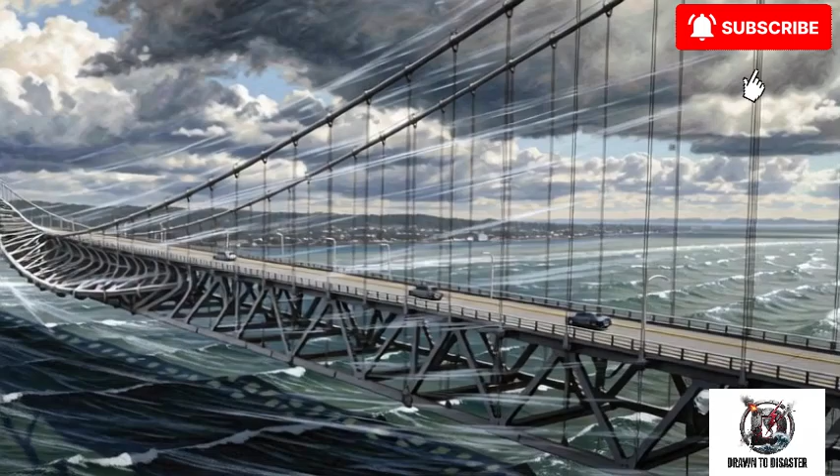The people who died on these bridges were not doing anything unusual. They were crossing water, crossing valleys, crossing roads. They were doing what bridges are built for people to do. These are the worst bridge collapse deaths ever.

Ashtabula Bridge Disaster. Ohio, 1876. The Ashtabula Bridge carried the Lake Shore and Michigan Southern Railway across the Ashtabula River Gorge in northeastern Ohio. It was an iron truss bridge, approximately 150 feet long and 75 feet above the river below. It had been in service for 11 years.

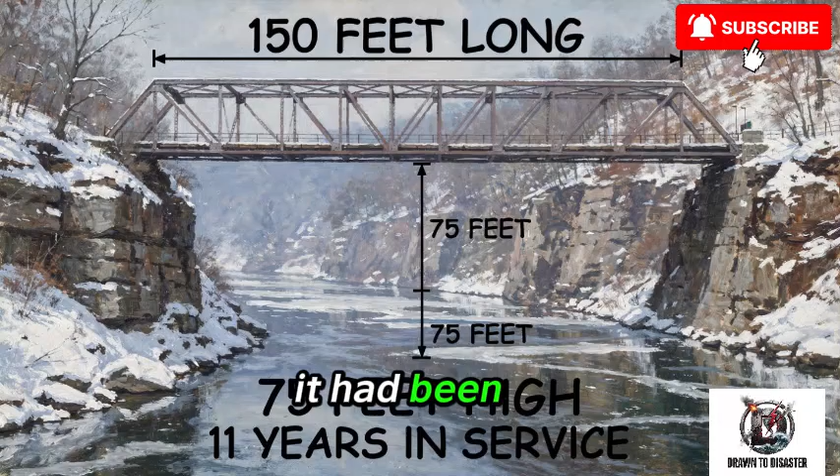On the evening of December 29, 1876, a passenger train called the Pacific Express was crossing the bridge in a blizzard. The train consisted of 2 locomotives and 11 passenger cars, carrying approximately 160 people. It was one of the busiest travel nights of the year, the period between Christmas and New Year.

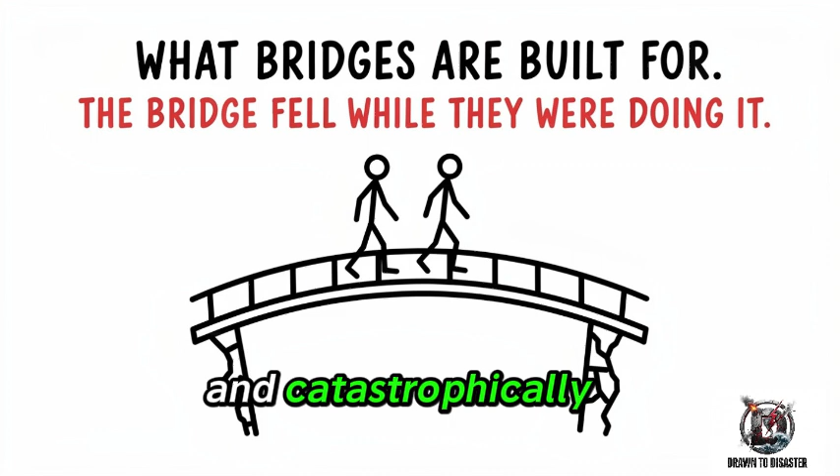At approximately 7:28 p.m., the leading locomotive crossed the bridge safely and reached the far side. As the second locomotive and the passenger cars followed, the bridge collapsed. The iron truss structure failed completely and catastrophically, dropping the train 75 feet into the frozen Ashtabula River below.

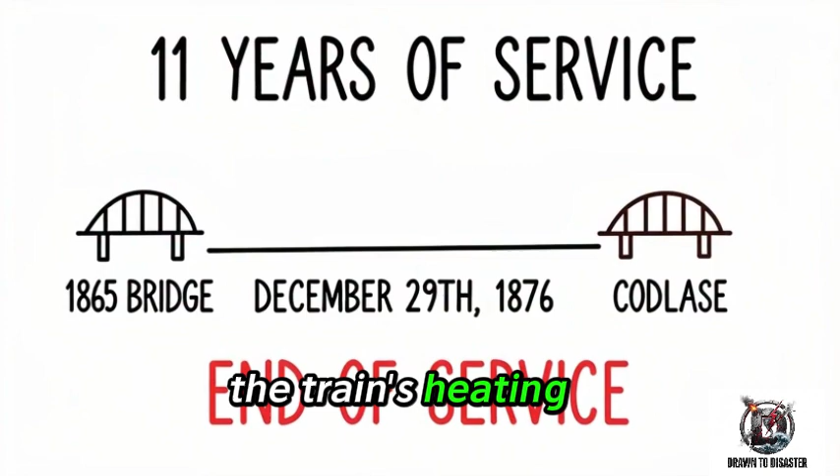The passenger cars fell onto the ice, compressed together, and immediately caught fire. The train's heating stoves, coal and wood-burning units, ignited the wooden car interiors within minutes. The combination of the fall, the crushing of the cars, and the subsequent fire killed the majority of victims. Many passengers survived the fall, only to die in the fire.

Rescue workers on the gorge above could hear survivors trapped in the burning wreckage, but could not reach them quickly enough through the blizzard conditions. 92 people died in the Ashtabula Bridge disaster. 19 bodies were never recovered, consumed entirely by the fire.

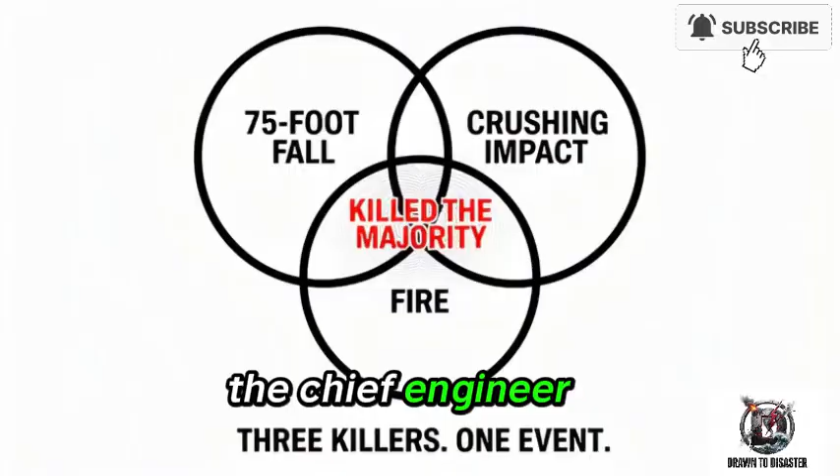Quebec Bridge Collapse, Canada, 1907. The Quebec Bridge was designed to span the St. Lawrence River south of Quebec City. When completed, it was intended to be the longest cantilever bridge in the world, a span of 1,800 feet across the river. Construction began in 1900.

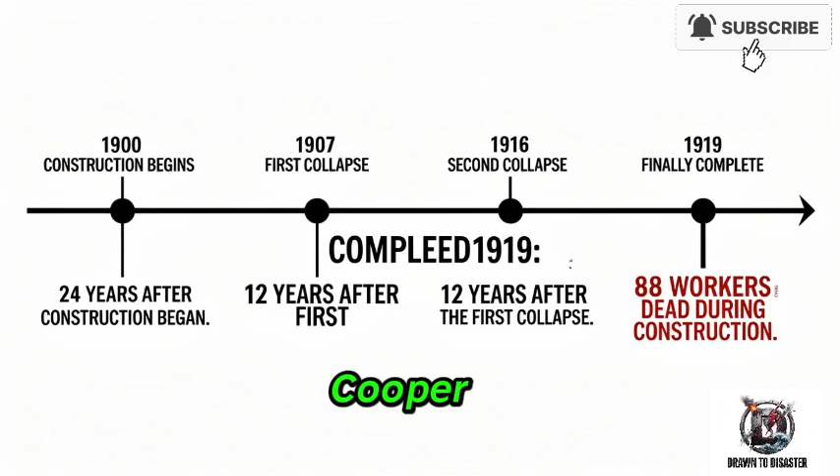The chief engineer responsible for the design was Theodore Cooper, a respected bridge engineer based in New York. Cooper had not visited the construction site in Quebec in over 2 years. By the summer of 1907, he was managing the project remotely, reviewing documents sent to him by telegraph and mail.

In the summer of 1907, concerns were raised about the deflection, the bending, of certain compression members in the bridge's south arm. Workers on the site noticed that steel members were bending in ways that the design had not anticipated. The concerns were communicated to Cooper in New York. Cooper sent a telegram on August 27, 1907, ordering construction to stop while he reviewed the situation. The telegram arrived too late.

On August 29, 1907, at 5:37 p.m., just as the afternoon work shift was ending and workers were preparing to leave the bridge, the south arm of the Quebec Bridge collapsed. The entire southern portion of the structure fell into the St. Lawrence River in approximately 15 seconds.

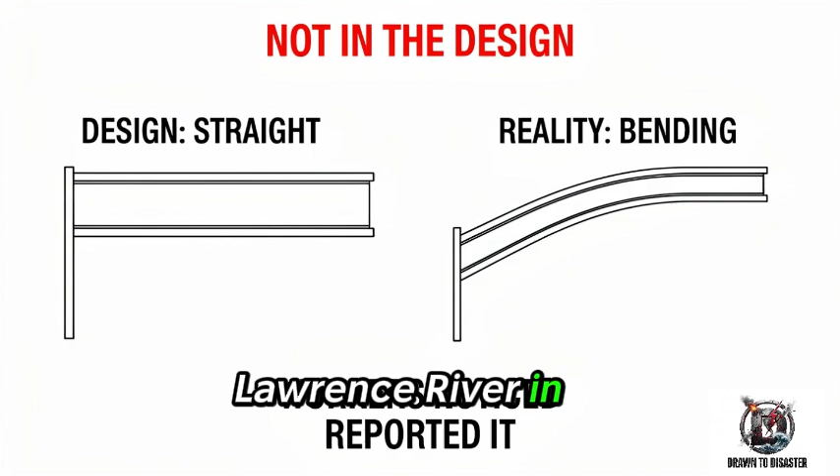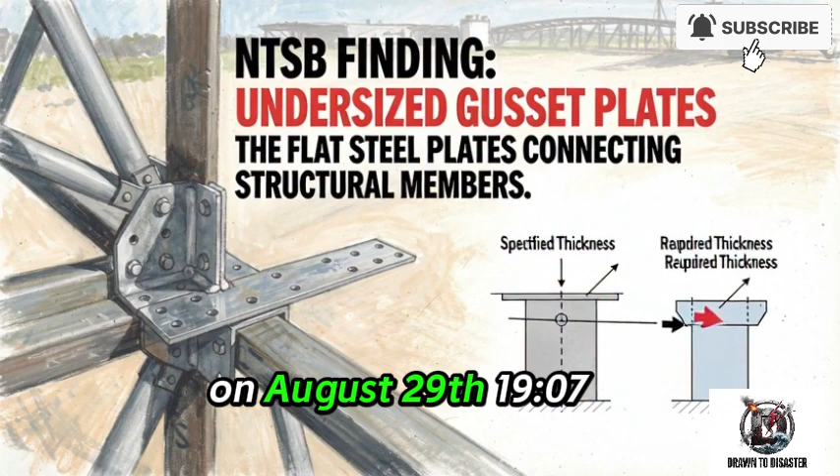75 construction workers died. The majority were Mohawk iron workers from the Kahnawake Reserve near Montreal, highly skilled structural steel workers who had become specialists in high steel construction. 33 Kahnawake Mohawk men died on August 29, 1907. For a community of approximately 1,500 people, the loss of 33 working-age men in a single afternoon was catastrophic. The Quebec Bridge was redesigned, and construction resumed.

In 1916, during the installation of the central span, a second collapse occurred. 13 more workers died. The bridge was finally completed in 1919, 12 years after the first collapse, and 24 years after construction began.

Tacoma Narrows Bridge, Washington, 1940. The Tacoma Narrows Bridge was a suspension bridge spanning the Tacoma Narrows Strait in Washington state. It opened in July 1940. From the first days of operation, the bridge exhibited an unusual characteristic. It oscillated visibly in the wind, earning it the nickname Galloping Gertie from construction workers and the local public.

Engineers and officials were aware of the oscillation from the beginning. Multiple reports were filed. The Federal Works Agency and the bridge's designers were notified. The response was to commission a study. The study had not been completed when the bridge fell.

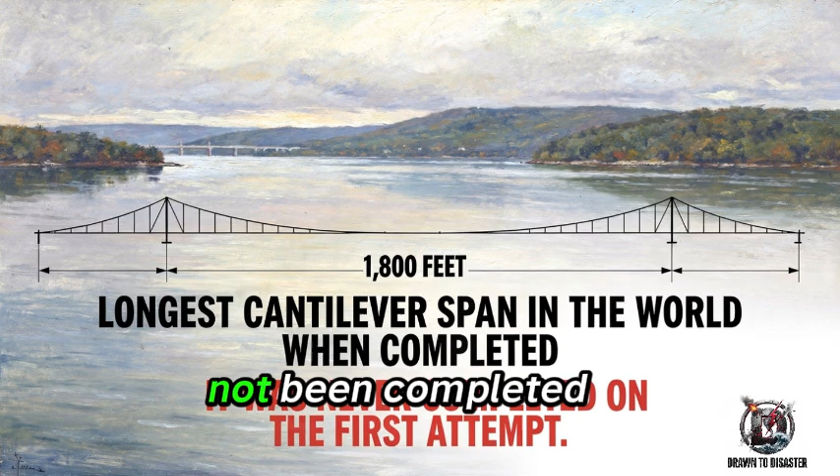On November 7, 1940, months after opening, sustained winds of 42 miles per hour caused the bridge to begin oscillating with increasing amplitude. The deck began twisting along its length. The oscillation became so severe that a man named Leonard Coatsworth, a newspaper editor, was forced to abandon his car on the bridge and crawl to safety on his hands and knees as the deck tilted 45 degrees beneath him. His car and his daughter's dog Tubby, who was inside it, remained on the bridge.

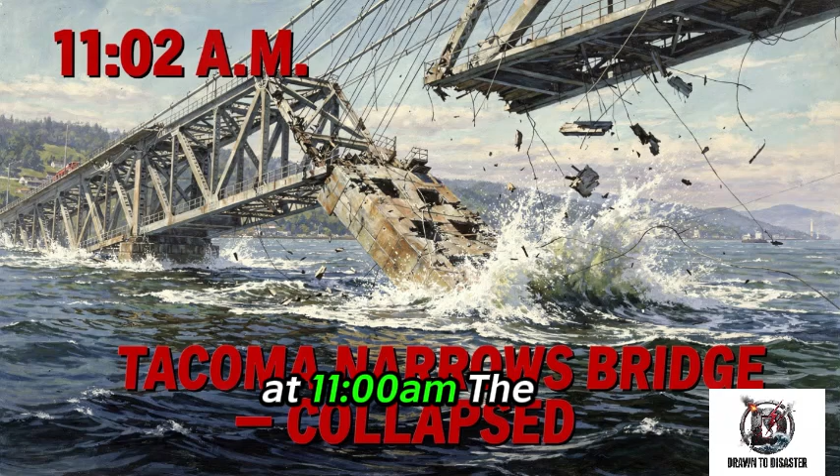At 11:02 a.m., the Tacoma Narrows Bridge collapsed into the water below. The 2,800-foot center span fell in sections. Tubby the dog died in the collapse, the only fatality of the Tacoma Narrows disaster. Coatsworth survived. The Tacoma Narrows collapse became one of the most studied engineering failures in history. Film footage of the bridge oscillating and collapsing was captured and has been viewed by engineering students worldwide ever since.

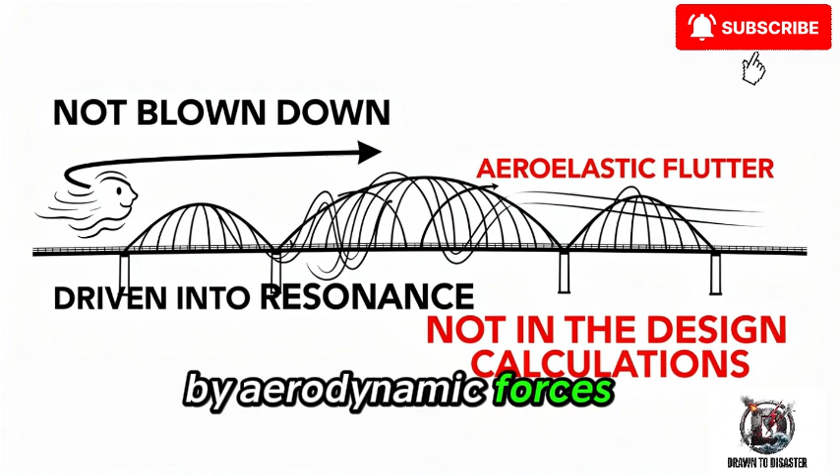The collapse demonstrated the phenomenon of aeroelastic flutter. The bridge was not simply blown down by the wind, but was driven into resonant oscillation by aerodynamic forces that the design had failed to account for. The bridge's insurance policy paid out. The designers faced no criminal charges. A new Tacoma Narrows Bridge opened on the same site in 1950.

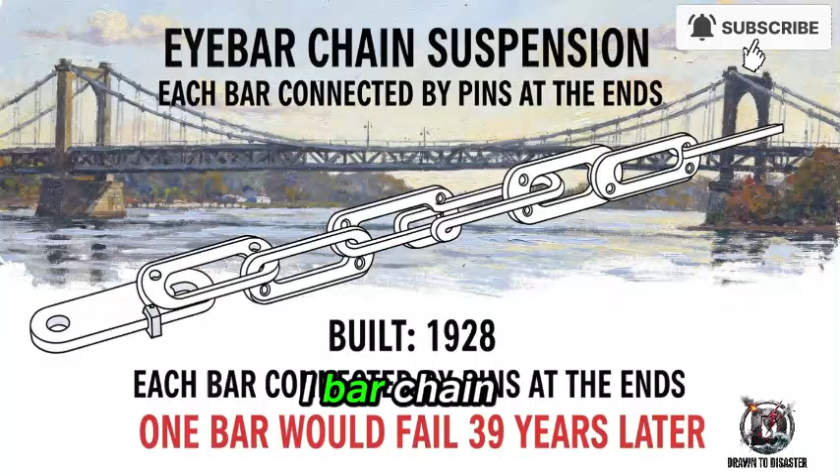Silver Bridge collapse, West Virginia, 1967. The Silver Bridge connected Point Pleasant, West Virginia, to Gallipolis, Ohio, across the Ohio River. It was an eyebar chain suspension bridge built in 1928. On December 15, 1967, it was carrying rush-hour traffic, commuters crossing the bridge in the late afternoon before Christmas. At 4:58 p.m., a single eyebar in the bridge's suspension chain failed.

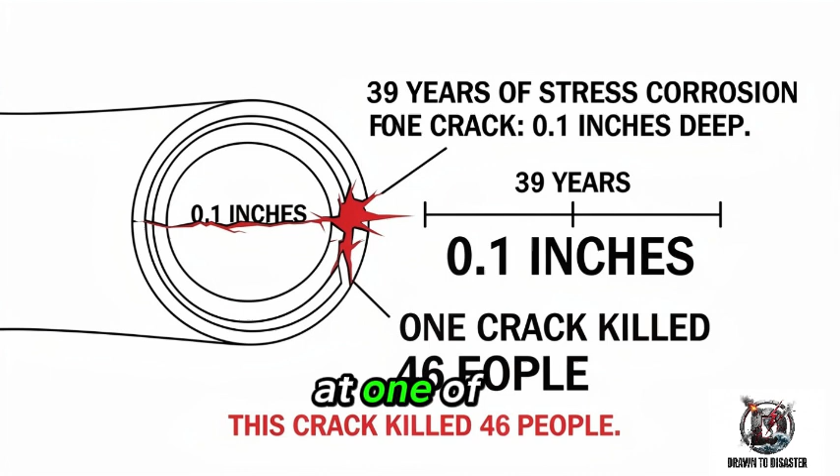The eyebar, a flat steel bar with a hole at each end through which a pin connects it to the next bar in the chain, had developed a stress corrosion crack at one of its pinholes over the course of 39 years of service. The crack was 0.1 inches deep. It was completely invisible to inspection from the bridge surface. No inspection method available at the time could have detected it.

When the eyebar failed, the chain on one side of the bridge lost structural integrity. The load transferred to the remaining structure, which could not support it. The entire bridge collapsed in approximately 1 minute. 46 vehicles were on the bridge at the time of collapse. 31 of them fell into the Ohio River. 46 people died. 2 bodies were never recovered from the river.

Among the dead was a 37-year-old woman named Charlene Wood, who was driving home from work with 2 passengers. All 3 died in the Ohio River. A 26-year-old man named Paul Cantrell was crossing the bridge on his way to pick up Christmas presents for his children. He died in the river. His body was recovered on December 17th.

The Silver Bridge collapse directly caused the United States government to establish the National Bridge Inspection Program in 1968, requiring regular inspection of every bridge in the country on a 2-year cycle. Before the Silver Bridge fell, there was no national program for bridge inspection in the United States. No standardized system existed for identifying aging infrastructure before it killed people.

De la Concorde Overpass, Laval, Quebec, 2006. On September 30, 2006, a section of the de la Concorde Overpass in Laval, Quebec, Canada, collapsed without warning onto the highway below.

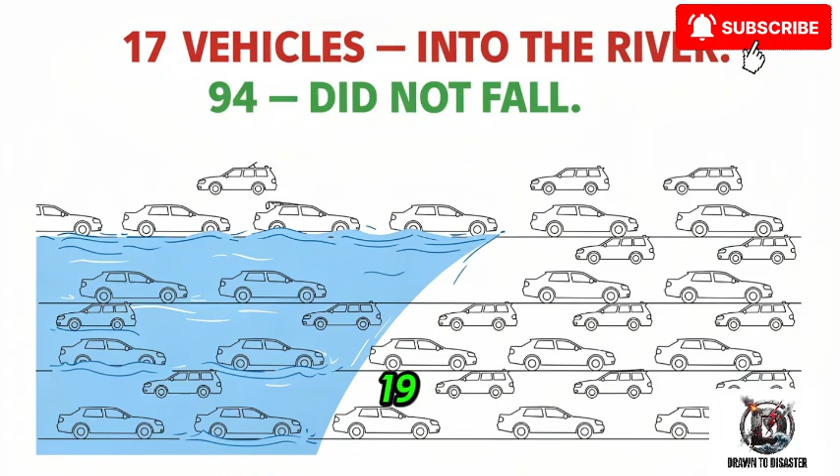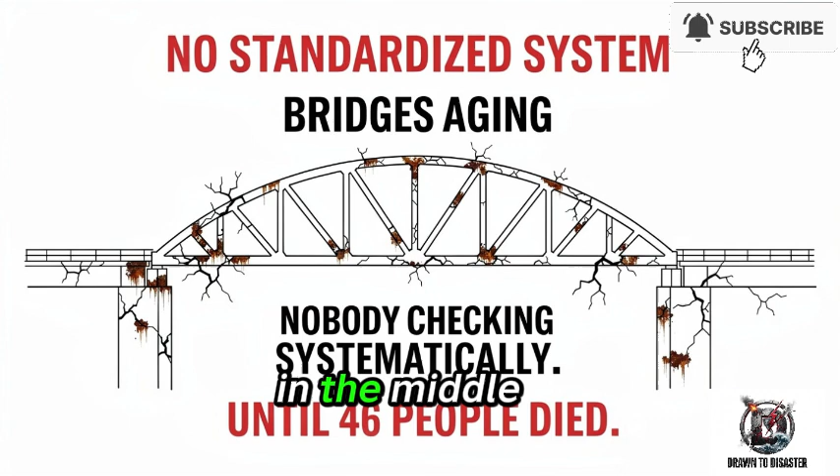The overpass carried Boulevard de la Concorde over Autoroute 19. It had been built in 1970. A 30-meter section of the overpass fell onto the highway below, crushing vehicles that were traveling beneath it at the moment of collapse. The collapse occurred in the middle of the afternoon, on a Saturday.

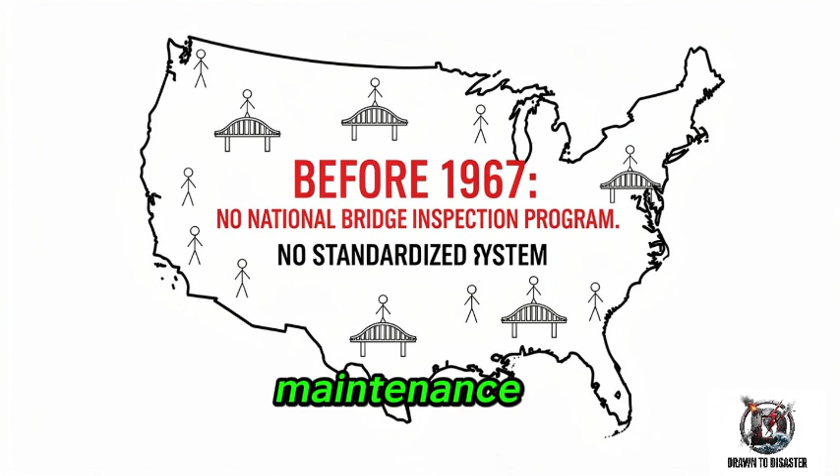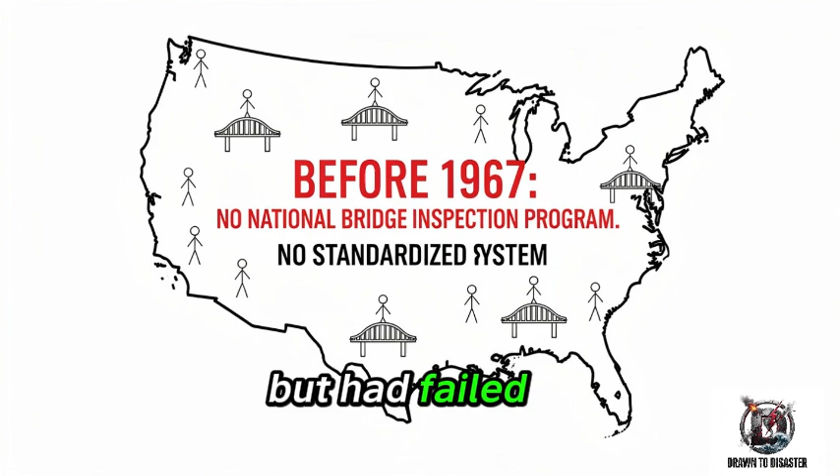The investigation that followed found that the overpass had deteriorated severely due to a combination of poor original construction, inadequate maintenance, and the effects of de-icing salts used on Quebec roads during winter, salts that had penetrated the concrete and corroded the reinforcing steel within. Inspections had been conducted, but had failed to identify the severity of the structural deterioration.

The Johnson Commission, established to investigate the collapse, found that the overpass should have been identified for replacement years before it fell. It found systemic failures in Quebec's bridge inspection and maintenance programs. 41 overpasses across Quebec were immediately closed for emergency inspection following the Laval collapse.

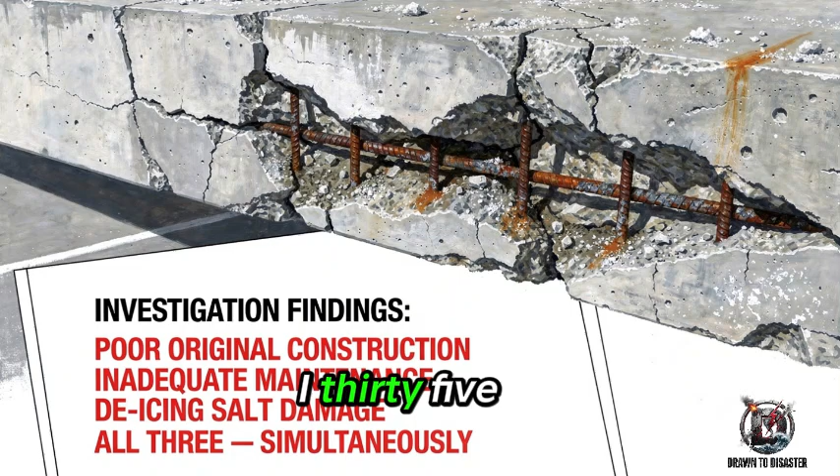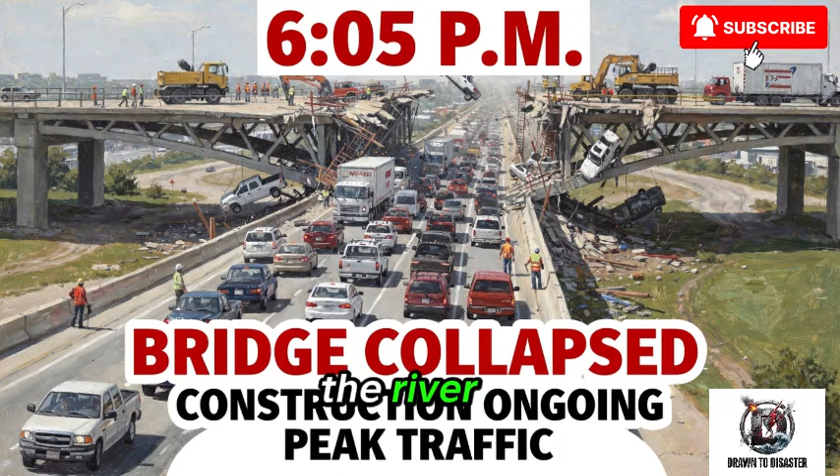I-35W Mississippi River Bridge, Minnesota, 2007. In August 2007, the I-35W bridge over the Mississippi River in Minneapolis, Minnesota, collapsed during the evening rush hour. The bridge carried Interstate 35W across the river and was one of the most heavily used routes in the Twin Cities metropolitan area, carrying approximately 140,000 vehicles per day.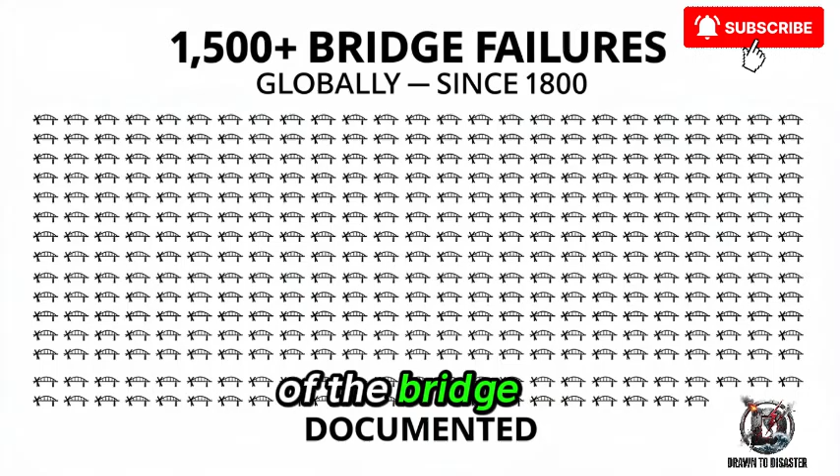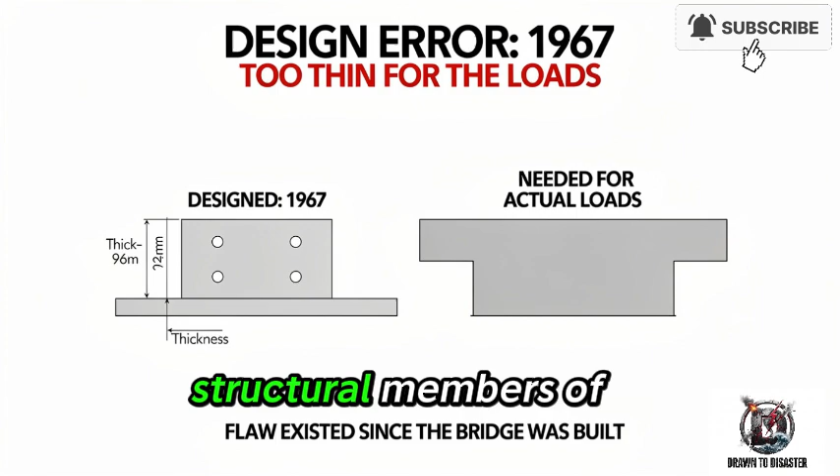All 52 children survived. The National Transportation Safety Board investigation determined that the collapse was caused by undersized gusset plates, flat steel plates that connect the structural members of a truss bridge at their joints. The original design from 1967 had specified gusset plates that were too thin for the loads they were required to carry. The construction materials placed on the bridge deck on the day of the collapse, approximately 287 tons of construction equipment and materials, had pushed the already undersized gusset plates beyond their load capacity.

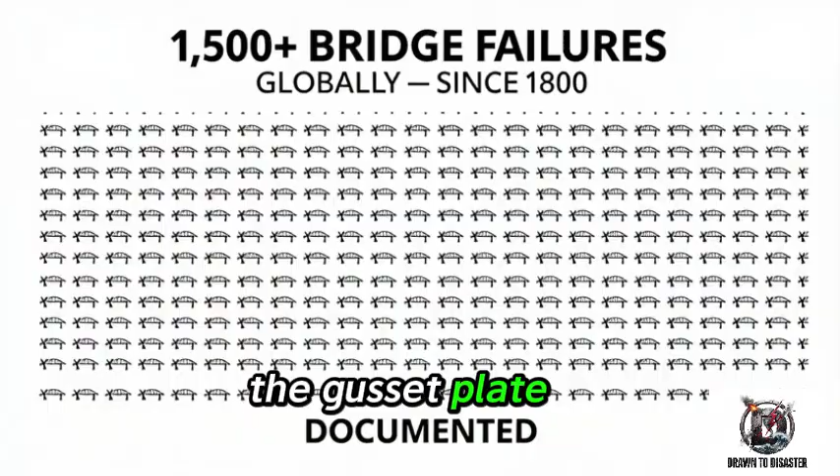The gusset plate flaw had existed since 1967. The bridge had been rated as structurally deficient since 1990. The inspection reports had noted the deficiency. Nobody had acted on them with sufficient urgency to close or repair the bridge before August 2007.

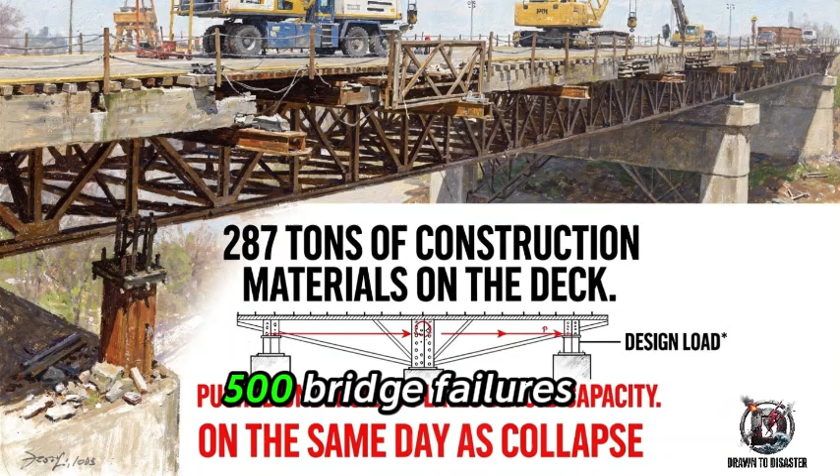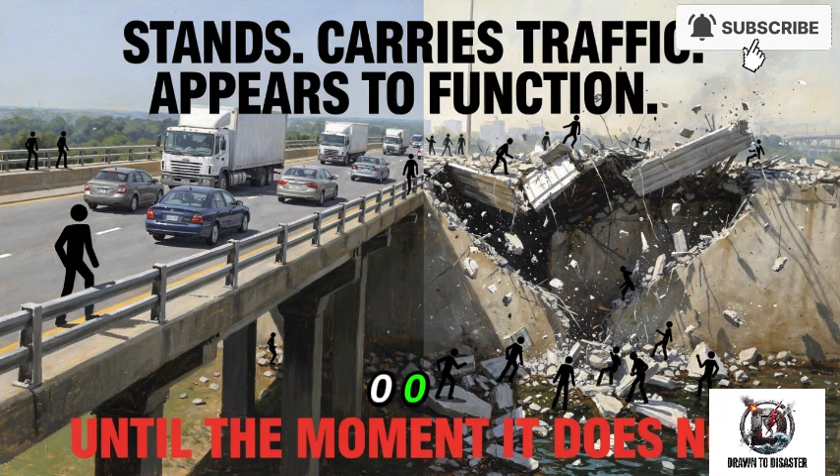The numbers: according to data compiled by bridge engineering researchers, at least 1,500 bridge failures have occurred globally since 1800. The United States Federal Highway Administration estimated in 2023 that approximately 42,000 bridges in the United States alone are classified as structurally deficient, meaning they have been identified as having conditions that affect their safety or functionality. 42,000 bridges in one country.

The common thread across every collapse in this video is not extraordinary weather, not acts of nature, and not events that could not have been predicted. The common thread is a flaw that existed before the collapse, a design error, a material defect, a crack developing over decades, a maintenance failure that was either not identified or was identified and not acted upon.

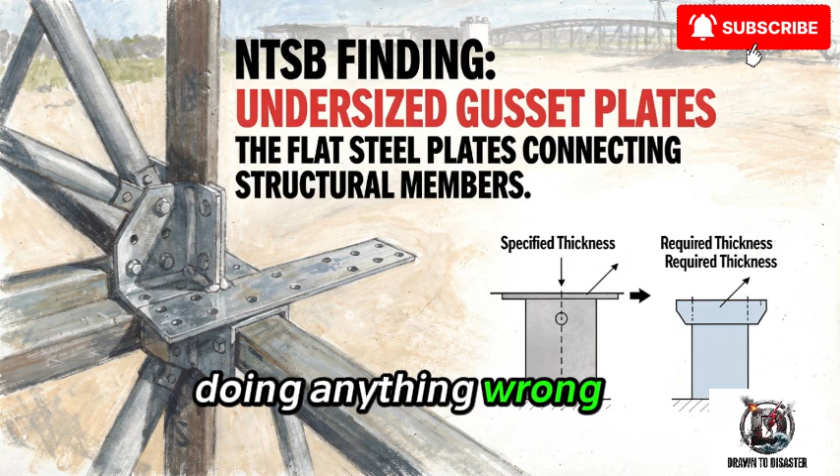The bridge does not announce when it is going to fall. It stands and carries traffic and appears to function until the moment it does not. The people crossing it at that moment are not doing anything wrong. They are crossing a bridge. That is what bridges are for.